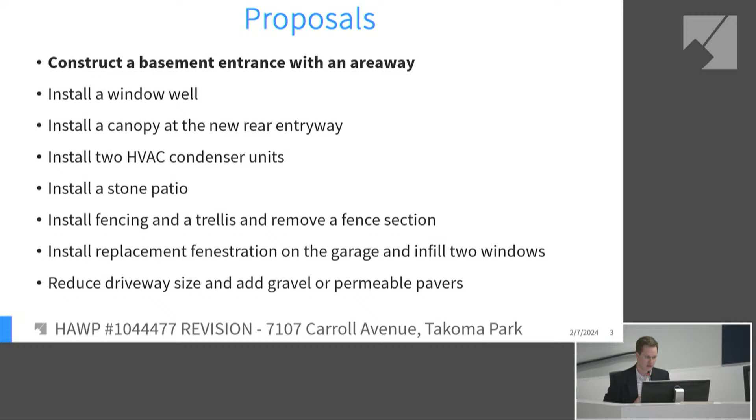These are the applicable regulations: the Takoma Park Historic District Guidelines, Chapter 24A of the County Code, and the Secretary of the Interior Standards for Rehabilitation.

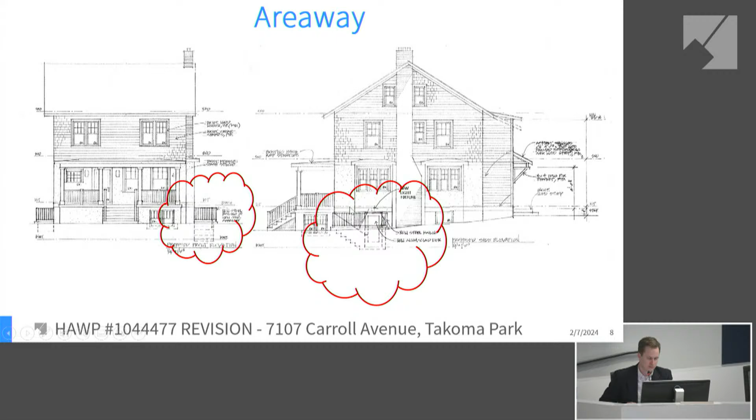So for staff findings and recommendations, staff does not support installation of the areaway in the proposed location. To the first point, the HPC previously approved the 2 shallow window wells under the porch on the right side elevation and a deep well with railing on the left side elevation.

And as I mentioned, they propose a 4th well on the left side elevation as part of this application. The proposal to add an approximately 50 square foot areaway with railing toward the front of the house would be the largest alteration to the foundation at the front of the residence yet.

The feature will be about 50 feet from the right-of-way, so it will be easily visible from Carroll Avenue, and counter to the Takoma Park design guidelines, the major alteration will negatively affect the existing streetscape, open space, and character of the residential property and the wider district.

Further, the areaway also does not meet Chapter 24A of the County Code and Standards Number 2 and 9 of the Secretary of the Interior Rehabilitation Standards, as adding the concrete stairs and walls and metal railing in the location are not compatible with the character of the historic district and will affect the historic integrity of the property and environment.

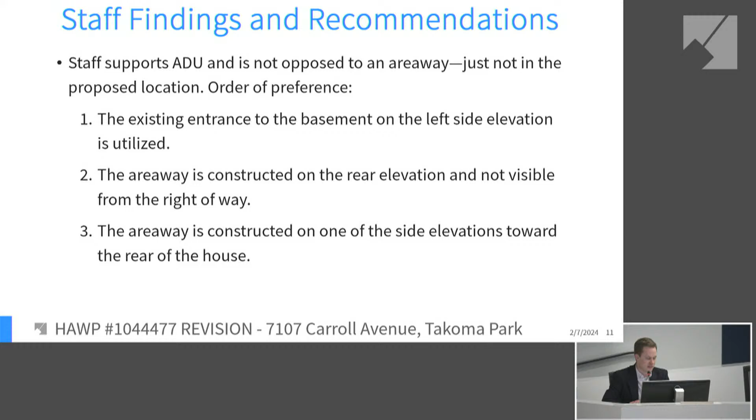The first is that the existing basement entrance is utilized. The second is that the areaway is on the rear elevation. And lastly, that it's on a side elevation farther back.

So there is precedent for recent approval of an areaway in the Takoma Park Historic District. The HPC approved one at 7200 Maple Avenue in 2022 as part of HAWP 982698.

So we'd like to maintain that standard set by the example in this application approved by the HPC. So any questions for staff?

Questions for staff? This is Commissioner Burdett. I did not see on their plans any pathway or paving leading up to the areaway. So the question is, is that supposed to be the main entry or a code required egress areaway?

I'll let the applicant answer that, but my understanding is that it is going to be both the main and egress entrance. Thank you.

Anyone else? Okay, if not, I would invite the owner or owner's rep to come forward.

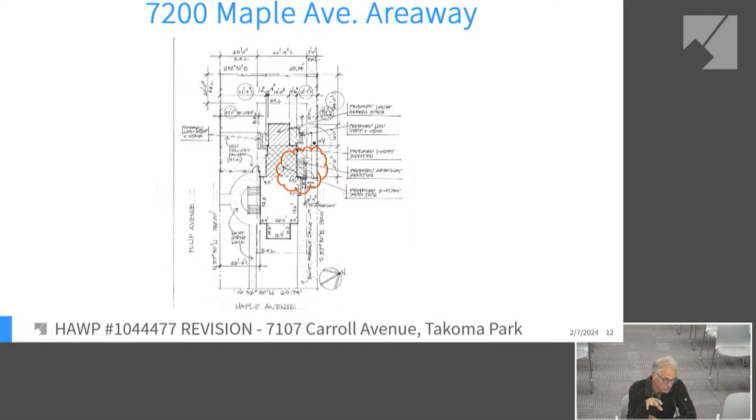Number one, the example of the project at 7200 Maple Avenue, that areaway that's on the corner of Tulip and Maple. That project actually had a second HAWP because the owners said they couldn't afford to do the large addition on the back. So we did a second HAWP for a different design, and that areaway was actually on Tulip Avenue.

So it was visible. It was on the Tulip Avenue side, not on the opposite side. So it was actually an areaway that was very visible from the right-of-way, the side street right-of-way. Okay, so there's a number of things to bring up about the areaway.

Number one, and there was a mention made in the staff report about the number of changes to the basement in this project to create an accessory dwelling unit.

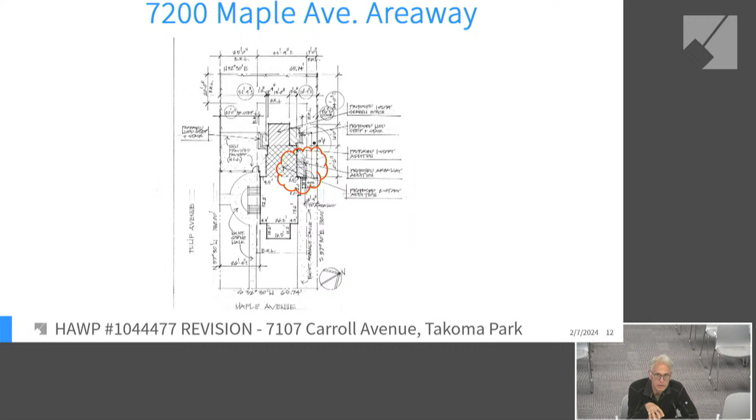There is a change to 1, 2, 3. There's 4 different windows and window wells being installed, and that is to create code-compliant light and ventilation into the living unit. So they weren't just arbitrary, they were to provide code-mandated glazing.

And the side entry off of the driveway that goes to a split stair going half a level down and half a level up, that actually is not a code-compliant egress or entry. So to not have an areaway, we can't really use that side entry as a main entrance. It has a number of problems with it.

I mean, there's a chance we could get a code modification for this type of entry, but that stair has so many problems with it that I would be hesitant to count on that being approved as a code modification. The width of the stairway is insufficient. The headroom is insufficient. The rise run of the stair is insufficient.

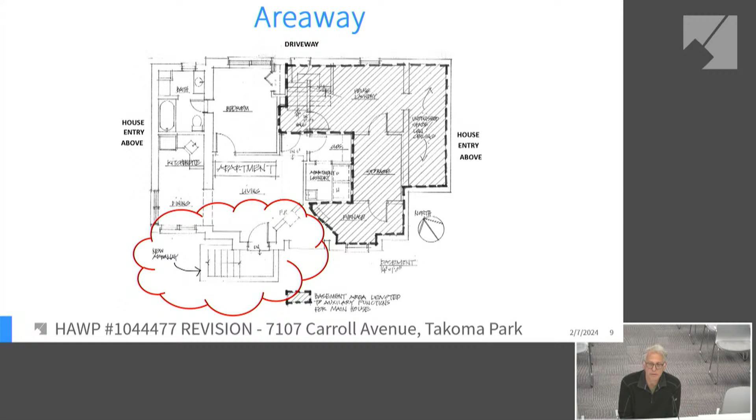The entire back area is fenced in for the use of the owners, so they wouldn't want the tenants to cut through their backyard because it's entirely enclosed with a fence. So they would have to walk around. In my mind, it's really the same thing as if someone parking on the street has to walk to their unit. It's all on private property, so I think it's an okay directive that they do that.

Any other questions? Commissioner Pelletier. Thank you.

I'm just curious why you're not taking the money that you were spending on this areaway and putting it towards making the existing stair more compliant.

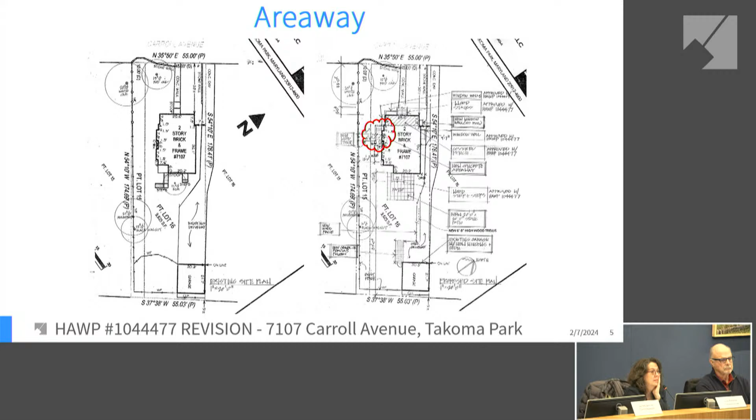It'd be very problematic to make it compliant, but the main reason is that the owners didn't want to share a pathway with the tenant. Is that their way of getting into the house, that side door? That is a way of getting into the house, but it's also the pathway from the first floor down to the basement laundry room. So they would be constantly in a shared space to go from the main house into the laundry room and storage and furnace room. And they didn't feel like that was an acceptable alternative.

Okay, thanks. I mean, if it has to be that way, they would just have to suck it up and do it.

I'm just curious, if they're parking over there, is that door kind of the main door for the owners of the house who live upstairs? Or do they go around to the front, or the back?

We're creating a rear entry, so they would park in the rear. We're also renovating a garage, they may use the garage. They would park in the rear, go through their private fence into the mudroom and kitchen, and that would be, as they put it, 99% of the time for them.

Oh, okay. And people who were visiting would come in, would probably park in the front driveway or park on the street somewhere else and come in the front door. So the front door really wouldn't be the owner's entrance. But it has to be, I mean, they want to create a front porch, so that'll be an entry, but it wouldn't be the main entry for them.

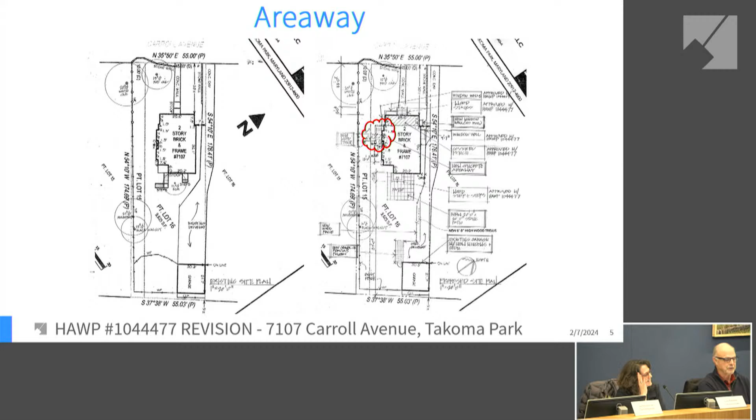I think the main issue really is that the owners did not want to have to create a locking system for that outside door where they would be sharing it with the tenant and then also sharing the stairway with their usage of the laundry room and the storage. It's complicated.

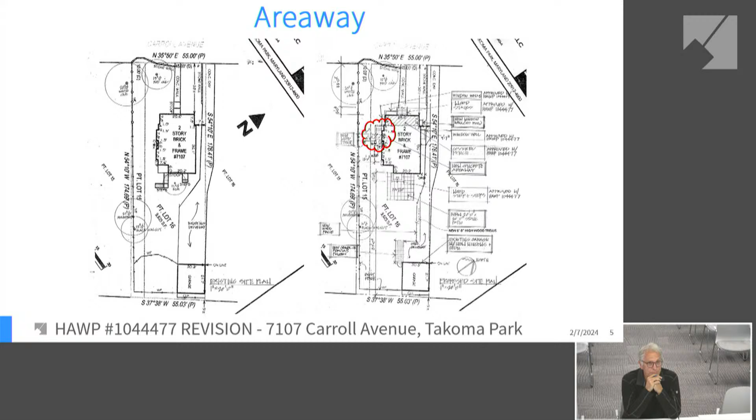Any other questions? Okay. If not, you're welcome to stay there or take your seat. I'll take a seat. And we will start our deliberations. Would anyone like to start the discussion?

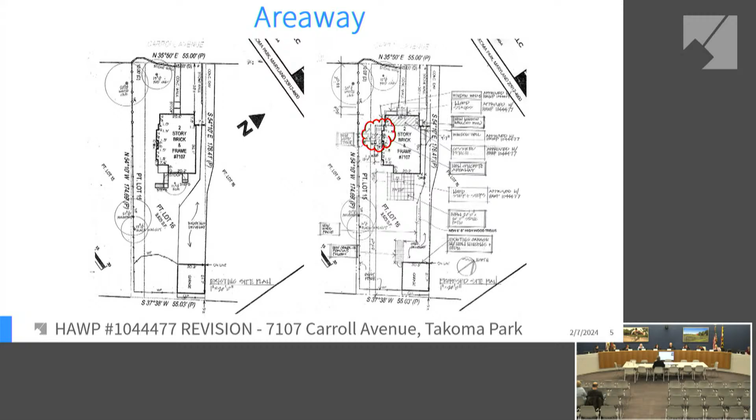Okay, Commissioner Burdett. I must say, while I do understand the owner's preference to not mix with their tenant, you're putting in a window well, a deep window well, and it's an egress window well on that north side of the house, right next to where an areaway would be very advantageous to get into that apartment.

Not knowing what the first floor plan looks like, obviously I'm just looking at the basement floor plan. It just, to me, I'm not sure I understand why more effort isn't being made to get the entrance area well on the north side of the house instead of the other way around, instead of where it is on the south side.

And then also, simply because it's so inconvenient for the tenant, I'm just thinking about snowy days, rainy days, all those days when it's just not pleasant to walk across a muddy yard. And I'm not seeing paving or anything like that that we will have to approve, paving around on the front of the house, going down to the sidewalk or in front of the porch.

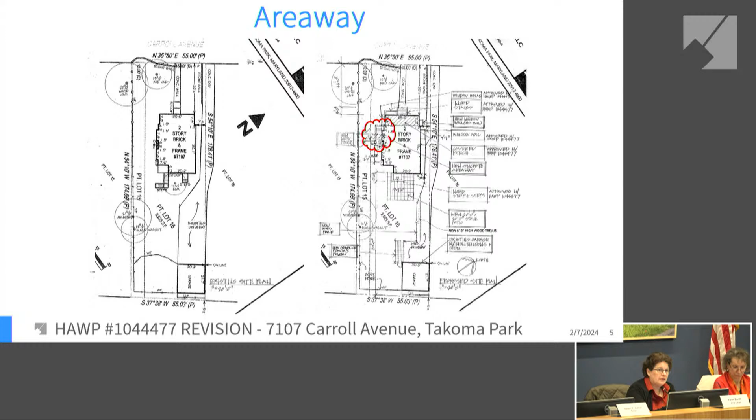And I guess also, the plan is a pretty basic plan, as if it's almost as if, could you have flipped it? The plan just 180 degrees so that the dining room is again on the north side. So that is just, was that explored? It should have been explored with the restrictions on this property.

With all that said, I think flipping the areaway you have shown should at least be shown flipped so that the first step down is to the east by the fireplace, by the chimney, facing backwards. And that is going to be wildly inconvenient for the tenant again, but it does pull that areaway a little bit further back.

But we are only talking about a rail at this point, correct? That is going to be visible from the street. So it's only the handrail around the areaway, which actually might be better if you're just seeing the one rail as opposed to the brake and the rail pulling around it. So those are my comments.

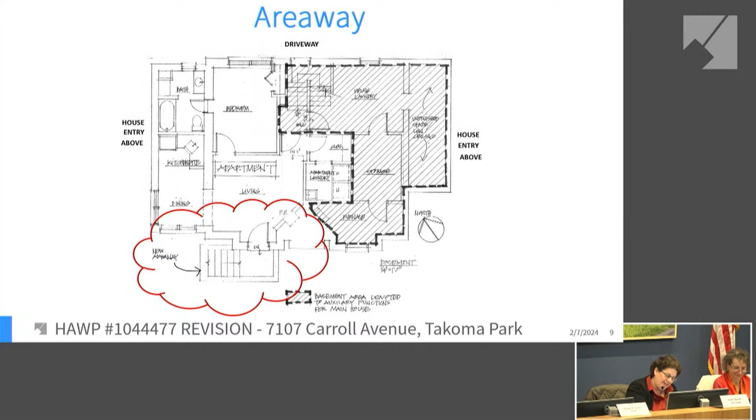Okay, all right. They're kind of rambling. Someone please take this further. Here, oh, sorry, go ahead. Commissioner Doman, this is Commissioner Doman.

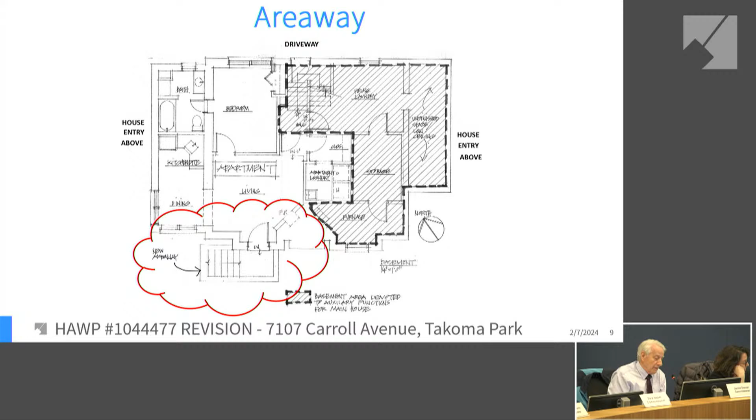I actually don't have any problem with this. I think the only thing is the visibility of the handrail, if I understand this correctly. I did not drive by the property. I did not see the property, and I don't know how visible this would be. Seems to me it's far enough back off the road, and we're not talking about a highly visible modification to this historic district. I just think that this is pretty unintrusive and pretty minimal, so I would support it as presented. Thanks.

Commissioner Pelletier.

Commissioner Burdett's idea of flipping the plan and using that areaway you already have, the egress areaway, kind of making it bigger. I keep wondering why you couldn't put two doors in there. If you got rid of that bottom stair that went down to the basement and made the areaway on the north side bigger, you could get in there. Maybe you have the windows, I don't know, I'm designing this in my head, but that one's already approved. So if you could make it a little bigger and a little longer and get rid of the one on the other side, I think it could work. Obviously you'd have to figure that out.

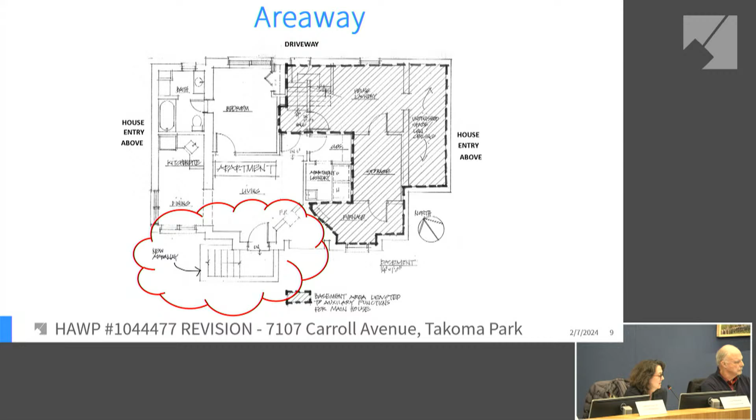I think there's just getting to be so many little things coming off of this house, like all the window wells, and I know they're low and won't have railings, but it's getting to be kind of a lot of alterations on the facade. So I would encourage you to maybe explore that other option for entry from the north side.

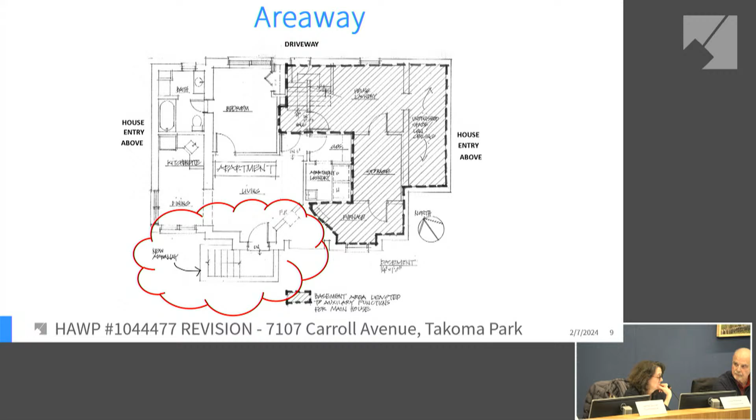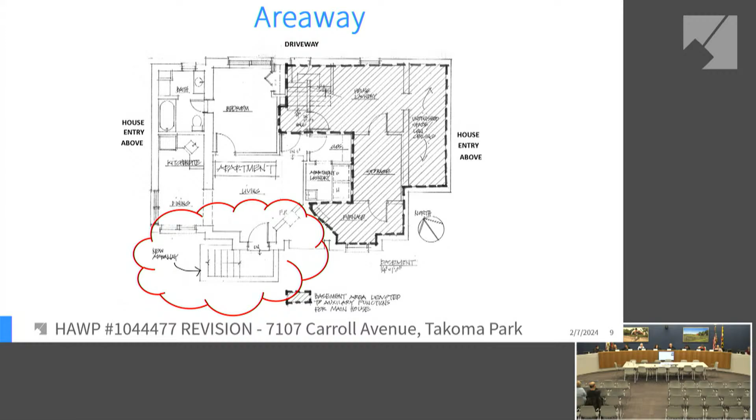That's all I have to say. Anyone else? I would like to have the picture of the house brought up again, if you could. Gosh.

I think personally, I sort of sympathize with the owner for what they want to do. Would I like to see it different? Yes, but I think the reasoning and the actual impact, I don't think the impact is substantial. I think the reasoning is reasonable. So I think I could support the project as presented.

Anyone else? Don't all speak at once, please. Do we vote? I'll speak. Commissioner Radu.

Looking at this photograph, if the railing — I'm looking at the main rail into the main stair, and it's not super visible. So if the rail at the new areaway would be minimal, the simplest rail possible, I think I can support this too.

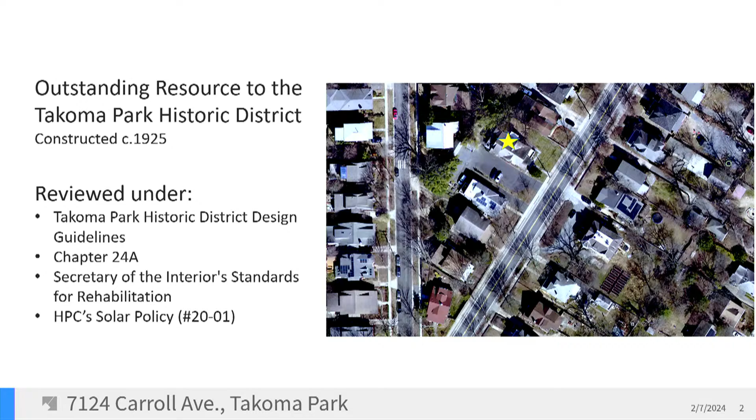Next. So the proposal is to remove the existing 3-tab asphalt shingle roof and install Timberline architectural shingles, including 3 sections of 48 Timberline solar shingles shown in the 3 locations here. Next slide.

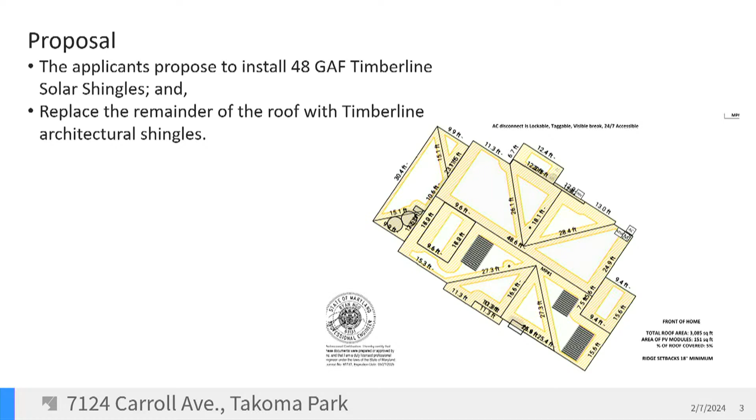As you can see, there are actually several outstanding resources surrounding this: one immediately to the north, one to the southeast, one immediately behind, and another one two doors down to the south. You'll see that both 7120 and 7118, the properties just below the subject property, both have solar panels on the roof.

In both cases, the HPC found that the solar panels would not significantly detract from the historic character of the houses or the surrounding district. For 7120, the HPC found that the narrow setback and 2-story height mitigated the visual impact of the panels. This was approved in 2014, long before the solar panel policy was adopted. The HPC also identified the rectilinear configuration of the panels at 7118 as a preferred arrangement, which created a more uniform appearance, and that HAWP was approved in 2021.

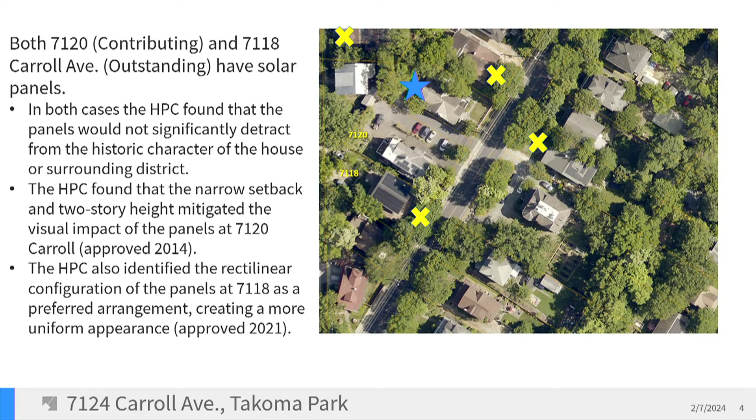We can move on to the next slide.

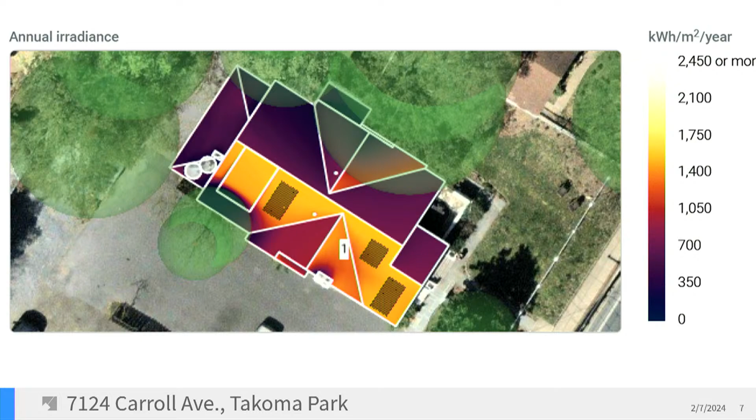Since the time of the staff report's posting, the applicant provided this roof heat map showing that the proposed locations are those with the highest solar collection. I believe, and the applicant has not cleared this up yet, that the dormer further to the rear of the house has a slope too narrow to accommodate the solar shingles, which is why they're not proposed for there as well, where they would be, for all intents and purposes, invisible from the right of way. We can move to the next slide.

I understand that a sample shingle was passed around during the work session, but unlike most other solar applications, the solar shingles are actually nailed to the roof sheathing just like any other shingle would be. Then they're wired to one another above the roof surface, allowing you to make as large or small of an array as possible.

And then they're covered with a wire cover piece, which you see in the lower right, meaning that the only penetration into the roof is at the highest point of the solar array.

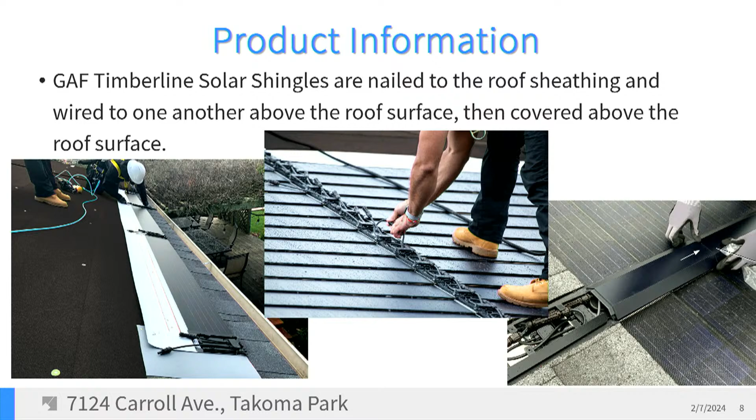Multiple sections can be tied to one another through there. It makes for a relatively quick installation compared to either traditional solar panels or something like the Tesla panels we've seen, which require almost a whole week for a roof because those are all wired underneath the roof sheathing. We can move to the next slide.

Staff finds that removing the existing 3-tab shingle and replacing it with an architectural shingle roof is a compatible change that could be approved at the staff level. Staff finds that the preferred locations are not appropriate for solar installation: the lot is too small for a freestanding array, the accessory structure is too small and not engineered to accommodate the added weight of any solar, and the rear addition is too small to accommodate the shingles and faces north, while the house orientation requires the panels on the left side to effectively collect sunlight.

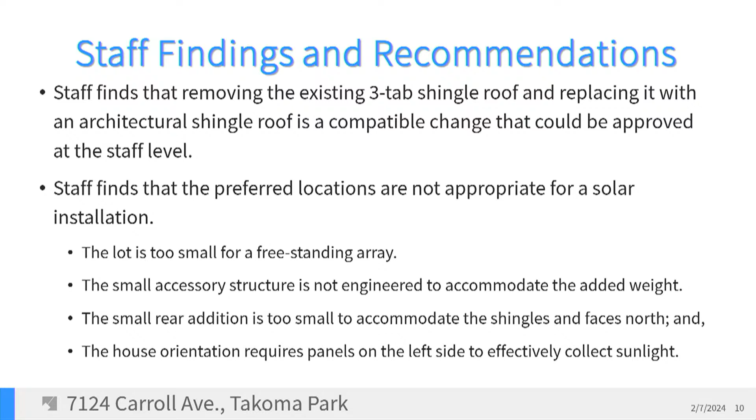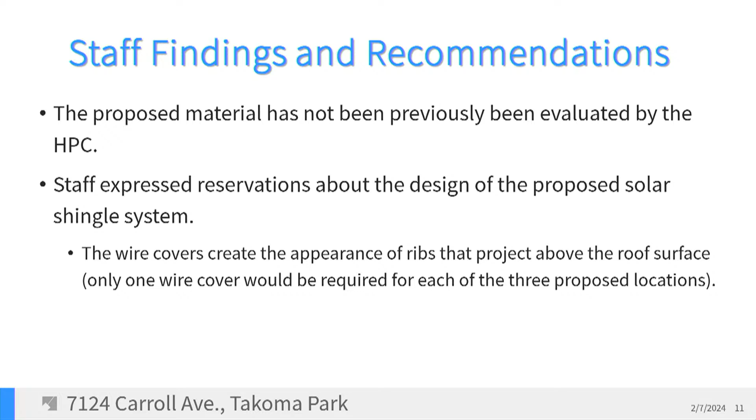The reason we're having this as a preliminary consultation is the proposed material has not been previously evaluated by the HPC, and staff has expressed some reservations about the design of the proposed solar shingle system. The wire cover creates the appearance of ribs that project above the roof surface. In this instance, only one wire cover would be required for each of the 3 proposed locations.

So again, this is just to reiterate from the staff report. The first question tonight is, does the HPC concur with staff's finding that the proposed locations are appropriate under the solar policy, or should some other consideration factor into the analysis for a HAWP? And does the HPC concur with staff's finding that the material is potentially inappropriate under the solar policy, under the standards, and under Chapter 24A?

And with that, I will answer any questions that you have for me at this time. Any questions?

Commissioner Doman, did the applicant provide information as to what percent of the building load would be provided by the solar? This may be something you don't know, but I was wondering if that information is available—I didn't see it in the report.

It's below 100% for this property. One of the interesting things about solar shingles is they aren't as efficient as a traditional solar panel, in part because they're nailed to the roof sheathing. Air isn't able to circulate underneath them and cool them, and solar panels are less efficient at higher temperatures. So this system benefits from ease of installation but is slightly less efficient than a traditional solar panel roof. This also offers flexibility to make the system larger or smaller based on the size of the roof and the needs of the consumer.

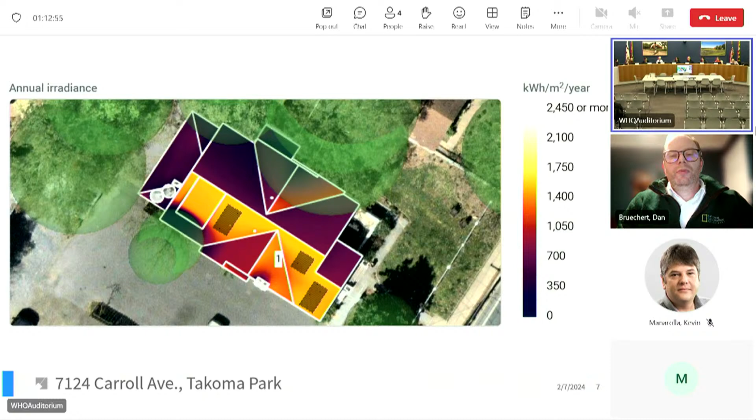Okay, if not, now I'm a little confused about who will be speaking. Will anyone be speaking on this? No, Chair Sutton, there is nobody to speak for the applicant tonight. Okay, is that correct? No one's here? Or there's no representative from the company either, correct? That is correct.

Okay, now we decided in the preliminary to go ahead with this, understanding that there would not be a property owner or a representative here, but we felt it was important to give our assessment of what we thought about this particular way of dealing with solar panels. We know that probably as things move along we're going to have different types of solar panels. This is one that we have not, to my knowledge, dealt with before. And so I think it would be to our advantage to give our opinions of what we think about this particular way of dealing with solar panels.

So would anyone like to kick off the discussion as to what your opinion is with this particular panel? We, of course, will give our opinion to the owner, and they will do whatever they want from that. So anyone like to kick that off? Commissioner Doman. Sorry, no, go ahead.

As you mentioned, we will always be looking at new products that come up, and each one will have to be evaluated on their merits. I think the roof application is mandatory in this case, it looks like all the heat loading and the solar heat gain is on the particular side where the panels are located. I guess what I would be a little bit concerned about is the optics of it. I mean, these things are sort of a dark gray or black, and in my opinion, if you had a roof that was a really different color, I think it would be quite obtrusive. I wouldn't like it, but if you can blend the roof in to be the same color as the collectors, I think that would be an approach. So that's only a comment. We're just looking for comments on how we could approach this new collector.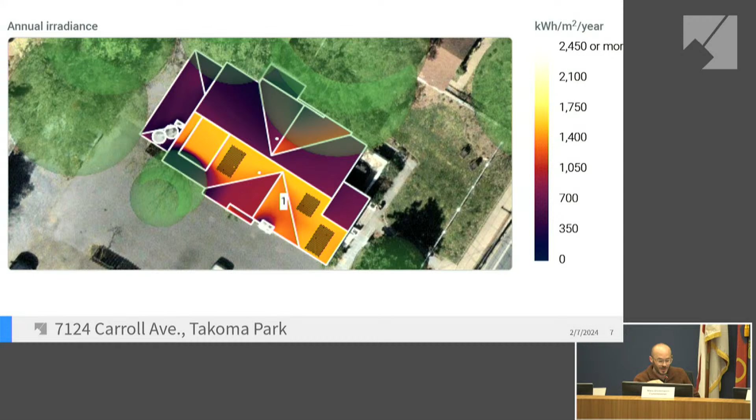Thank you, anyone else? Oh, Commissioner Dominiani. Hi, this is Commissioner Dominiani. To pile on as well, I think the rib that carries the wires, adding the long batten piece, piling onto what Commissioner Pelletier says, unfortunately I don't find to be compatible, and I think it would draw a lot of attention to that color difference where the solar panels are going to be located. I think it might not be appropriate. I understand it's a powerful tool for generating electricity, et cetera, but it might not be an appropriate application where it'll be visible from the street, because that rib does draw even more attention, being perpendicular. A few of the photos shown in the presentation show the rib reflecting light separately from a different angle compared to the panels, making it very visible to people walking by or from rights of way. So in my opinion, this is an interesting product, perhaps not best applied right here.

Anyone else? Commissioner Burdett.

The HPC sometime last year or the year before went around Takoma Park looking at existing solar installations, to get a feel for how they worked, so we would have a better understanding of the technologies and how they end up looking on houses in Takoma Park, which have a lot of dormers, gables, and interesting roof forms. It was a very informative exercise on our part.

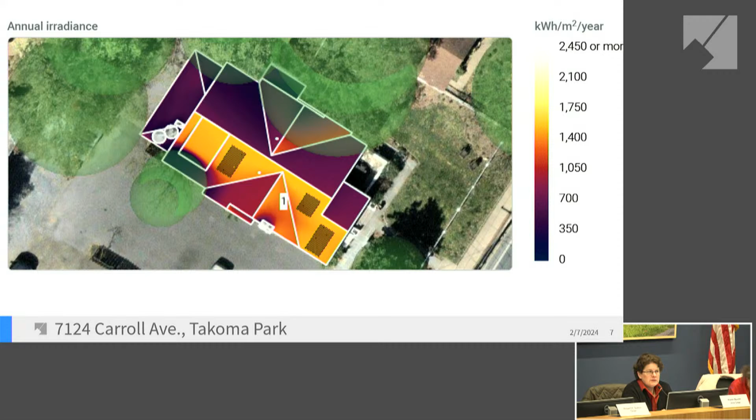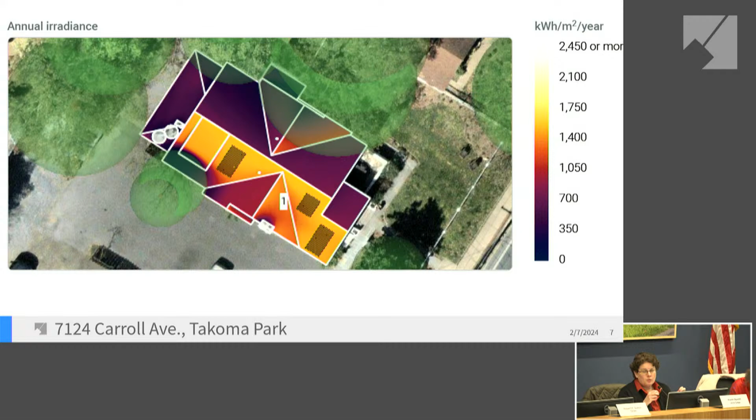One of the guidances we had after that was that it's always better for these installations to be coherent on the roof. They make sense, rather than a patchwork of panels here and there just trying to get the best power, because solar companies are technical, they're all about getting the most energy produced, whereas the rest of us are visual. If it looks like clutter on the roof, it's clutter, no matter how much good it's doing.

That's how we encourage more traditional installations, to try to get these things to look coherent. Even though this is a low profile product with merit, my initial take looking at the photographs is a big gray tarp with 2x6s nailing it into place. That's a crude way to put it, and I'm sure it doesn't look like that in real life—it looks better—but it lacks visual coherence.

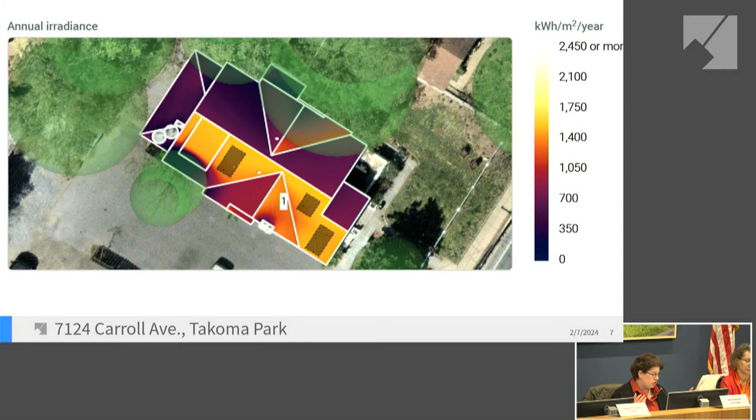Even the one photograph of the larger house—obviously nothing in one of our districts—where it's six in a row, even if they put a false batten at the end and along the tops, it would make more visual sense. So it concerns me that this little house just looks like tarps put down on a failing, leaking roof. That would be my concern.

So I would like to see from the applicant some more photographs of comparable installations, and more information about whether this is really it, or if they have some options that make it look a little better. Because I think the technology, if it's really just these 65-inch by 7-inch shingles that stack, it's going to be great on modern contemporary subdivisions, but maybe not going to work as well on Takoma Park roofs. So that's my take.

Question. Okay, go ahead, yeah that's fine. I think we're sort of trying to—yeah, that's absolutely fine, ask a question if you like. Okay, I'm sorry, that's my last question. There's... famous last words.

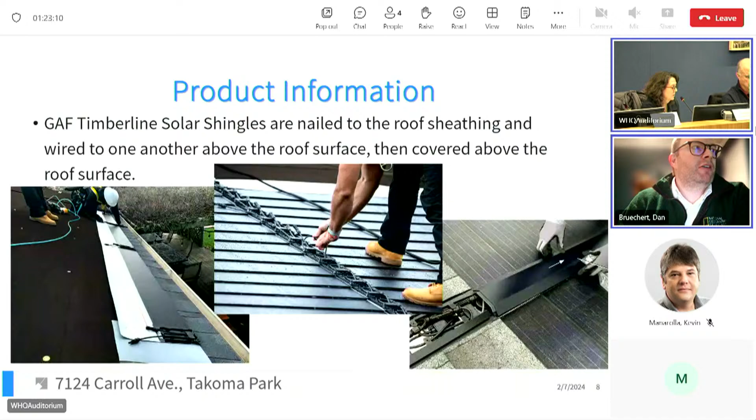I was just curious if this brochure is what they're doing—are they re-roofing, or are they just... Yeah, so they are removing the entire 3-tab shingle roof, and the solar shingles are installed during that roof replacement.

Real quickly, if I could share my screen—the applicant did provide, after the staff report went out, a rendering. I don't know if you're seeing it, yeah you're seeing that. So this is the location and size. It's not from grade, obviously, but it does provide some perspective about where the solar shingles are proposed and how large they're going to be.

The one in the rear is totally obscured by that side dormer or side gable roof, so it won't be visible at all from the right of way. It really is these two in the front that are going to be much more visible.

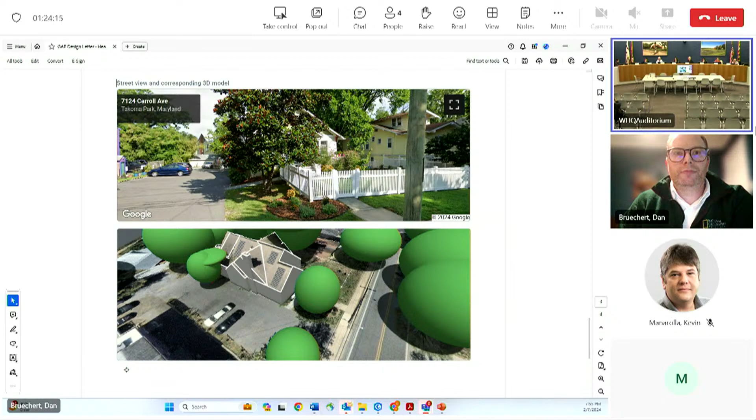Okay, thanks. Anyone else? Commissioner Galway.

Commissioner Galway: I'm not going to repeat everybody else's comments, but I heard things like it's not compatible, the optics are a little off, there's a patchwork of panels, and I tend to agree with all of that. I do compliment the owner for trying to save energy and use renewables. I think that's a very positive thing.

But when I look at the math provided here, the area of the PV modules is 151 square feet, and based on what the manufacturer says they can get out of the panel, it ends up being 2,150 watts, or approximately 1.35 hair dryers. So I question whether this patchwork of, in my opinion, unattractive panels is worth all the trouble. I applaud it, but if it were in a location where we really wouldn't be able to see the panels, that's one thing. To see this on the front of the house for the very small value it brings, I'm just not on board. Thank you.

Okay, if no one else has comments, I have a couple. First, there are companies, which I won't mention, that provide shingle-type covering that covers the entire roof, and I think that's very desirable. The other ones we've looked at and approved are panels that are attached to the roof. My main concern about this is that it becomes a permanent part of the roof, and I think it's not attractive. I think one reason we've been approving solar panels in the past is we look at them as sort of temporary.

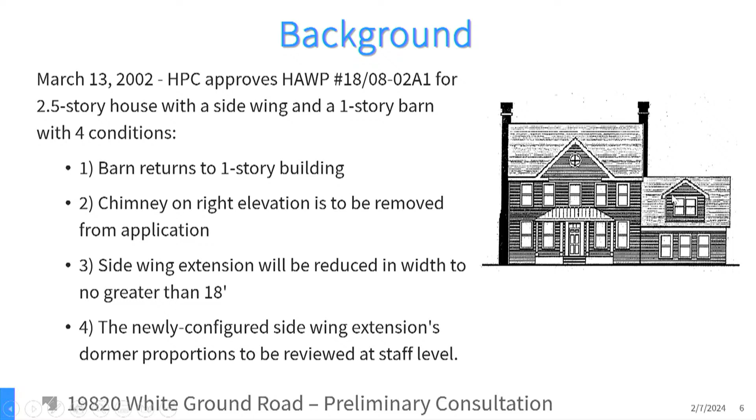The applicant appealed the HPC's decision. The Board of Appeals allowed the 2nd story on the barn, but affirmed the HPC's decision to deny the 2nd chimney and limit the side wing to 18 feet and require staff to review the dormer on the wing.

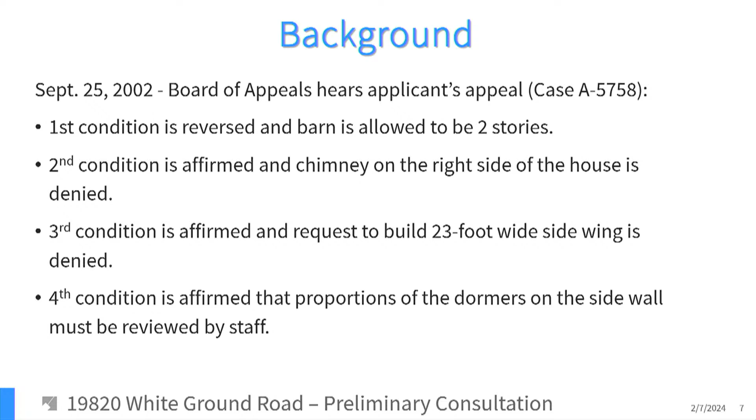Later in 2002, the applicant came back to the HPC with the redesigned side wing. The HPC approved the plans with those 2 conditions listed there, again requiring that the 2nd chimney not be built on the right elevation, and of course this house was never built.

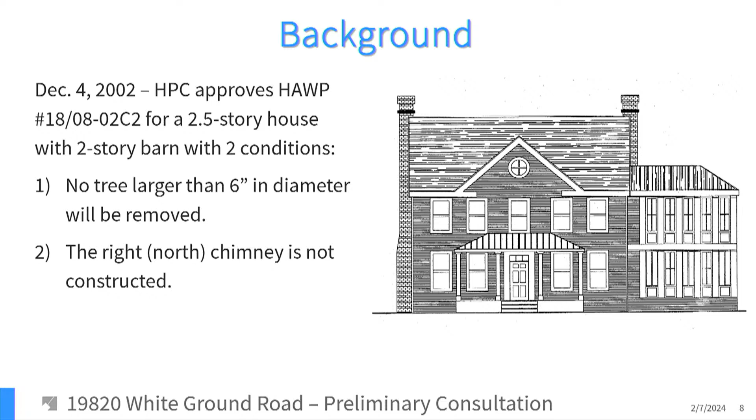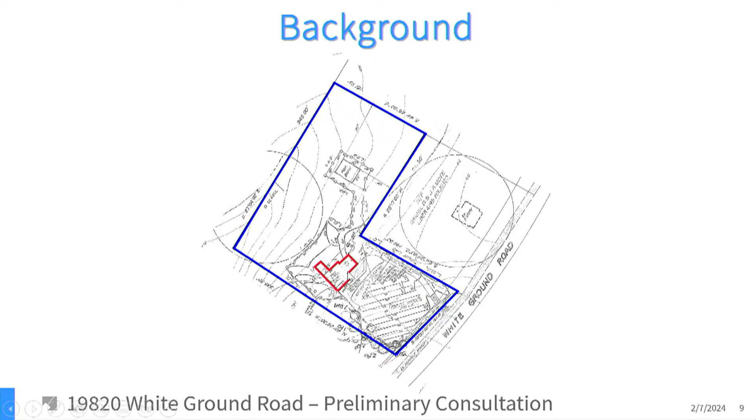Here's the site plan for that 2002 approved house with the property lines in blue and the proposed house footprint in red. It was set back, or proposed to be set back, about 150 feet from White Ground Road.

Comparing it to the current proposal, the applicant proposes to set back the house about 100 feet from the road, and it would be located—these topographic lines show that it'll be on the highest point of the property. The subject property is adjacent to 2 residences listed as primary resources within the Boyds Historic District.

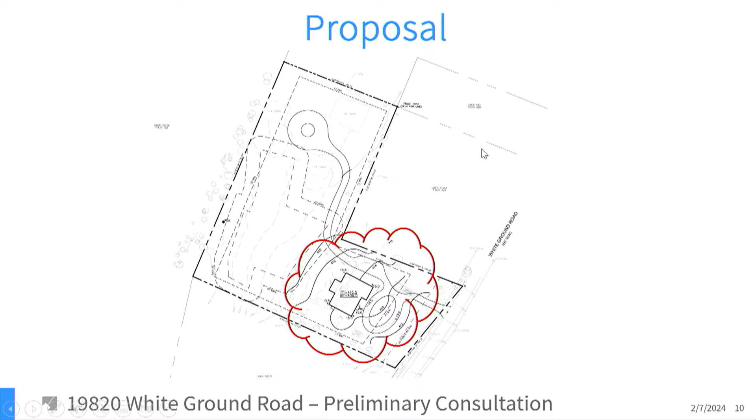The residence at 19810 White Ground Road is set back 90 feet from the road, and that's over here. And 19900 White Ground Road is set back about 35 feet from the road.

It will measure 34 feet 9 inches tall from the ground to the roof peak at its highest point. A 2-bay wing will be located on the right side. The 22-foot wide wing will also be 2.5 stories tall, slightly set back.

Here are the floor plans. As you can see, the ground floor, which is over here, will have an in-law suite, and the top floor will have 4 bedrooms.

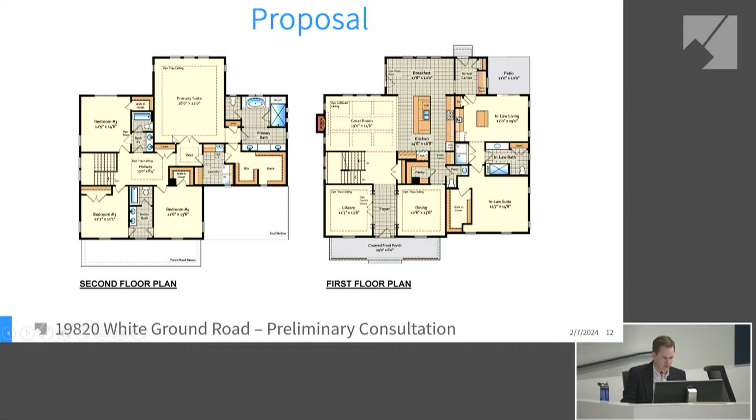It's set back about 430 feet from White Ground Road and behind two other residences, so it's minimally visible. And staff does not believe the massing on the wing should be used as a model for what's proposed on the subject property at 19820 White Ground.

So to summarize staff's opinion: the proposed building size, scale, and massing are too large compared to the other homes in the district. The proposed wing is too wide than what was initially approved back in 2002 and affirmed by the Board of Appeals—the 18-foot width limit for the wing.

I guess one of the questions alluded to earlier is why the house is located where it is. In the previous application, the house was set 150 feet back, and now it's a lot closer to the road. It's also on a prominent high spot on the lot, if I interpret this correctly. Is there any reason this could not be moved further back? And my other question would be, what is the elevation from grade level to the peak of your ridge roof on the house?

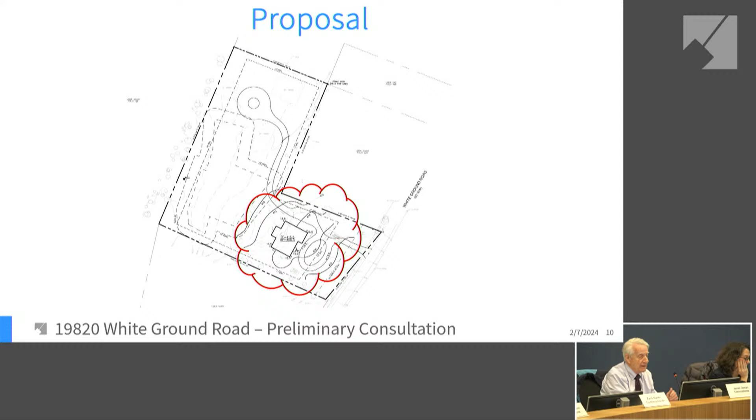So on your first question about the location of the house, I believe the house could and would be set further back, and I believe that would work. We addressed that in our application, 150 to 200 feet from the street. Regarding your second question, as to the height of the structure, we're using a number closer to 34 feet in height, but it would be under 35. At this point, we're early on in our preliminaries, but it would be approximately 34, under 35 feet in height.

Any other questions? Commissioner Burdett. Looking at a septic field layout from 1982, is the intention to lay the septic field out towards the front, from the front of the house to the road? Is that still your intent?

The septic system had already been determined, I believe, before we were brought on. It had been perked, and that's where it had been located when you all purchased it. It's going to be in front of the house, between the house and the road, correct? Right, that's where it's shown now.

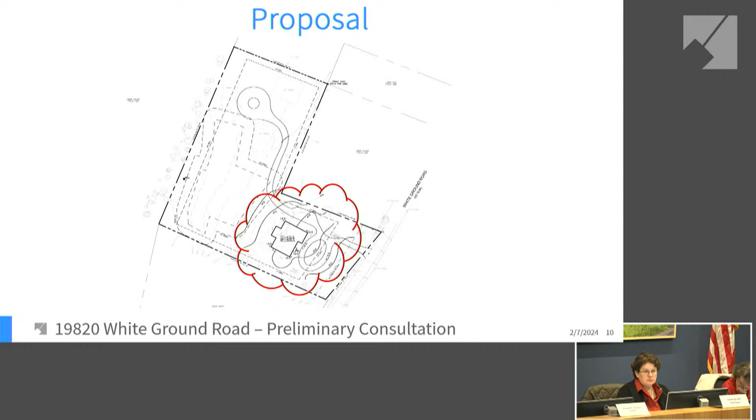In '82, when this was done, I'm assuming the current house is much larger than what was done, so has that also been checked? The original footprint approved by the commission was approximately the same size. I believe the box of the house was around 32 feet, and the piece to the right of the house was approximately 18. Ours is 32'3", and it's 21'8". We could modify our existing structure to follow very close to that footprint as far as the frontage goes, if that would help.

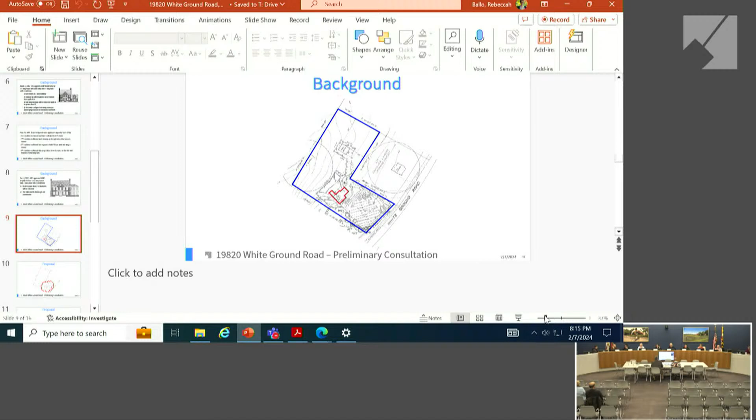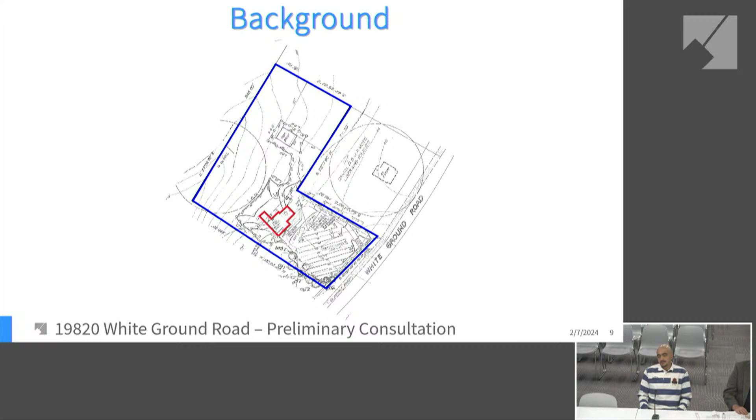Next question, the existing barn structure or farm buildings, are they going to be maintained on the property, or will they be removed? Is this going to be just a residential lot without any other use to it? Our intent is to use that as a detached garage, and yes, we're going to maintain it and use it for storage.

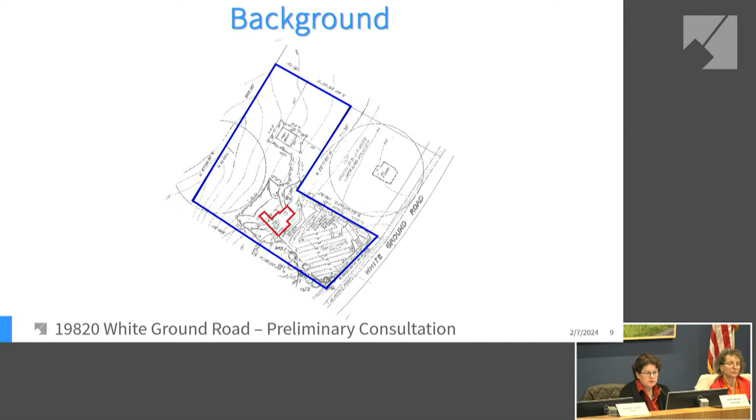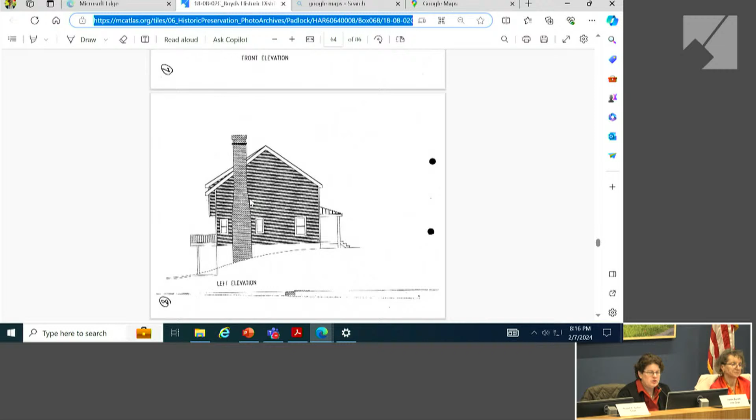But you're not going to be planting any small lots or a large garden area, or put up a horse ring or anything like that on the back of the property? Did you look at putting the house behind the other houses, your adjacent properties, back where those barns are? Because it would make a difference if the house was positioned further tucked away, put it that way. Just asking.

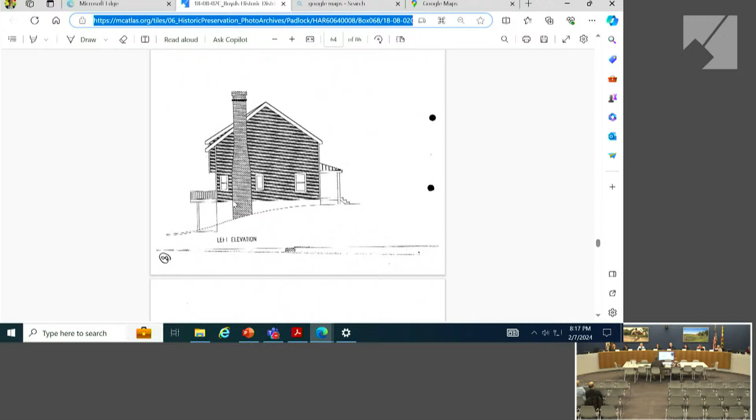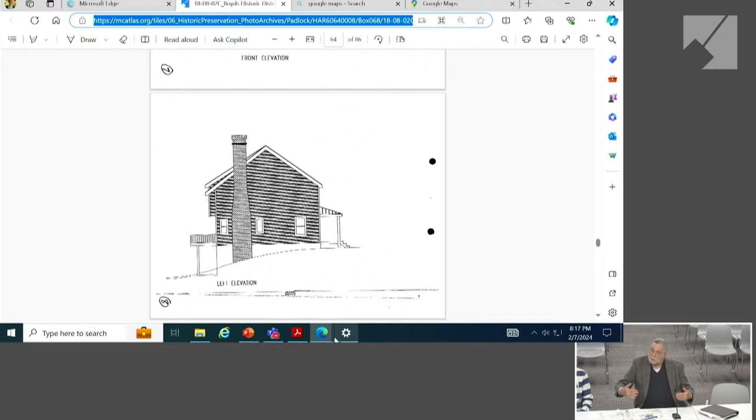I would be happy to look at pushing the house further back. Sometimes in working with other historic groups, in many cases they want us to respect the BRL and pull the structures more up toward the street to maintain that look. In this case, if you feel it would help the feel of the rest of the neighboring houses, we'd be happy to look at pushing the house further back on the lot.

One other question I have, the roof structure for the house, is that just trusses, or is there living space up in the attic area? On the main body of the house, we were proposing an attic built into the trusses, an attic loft space. It's approximately less than 1/3 of the floor area, and it would be like a granny room. The only way you would know it was there is on the gable side, there would be a window up above the stair.

Okay, thank you. Any other questions?

Okay, thank you so much. Now what we will do is we will deliberate here. We'll give you what we think about the project. I am very proud of the service we provide, because we want to make sure that when it comes before us for a historic area work permit, that we're able to approve it. So we will give you what we think. That said, you're not required to do what we tell you to do, but it's often a good idea to pay attention because it will come before us at some point for a historic area work permit.

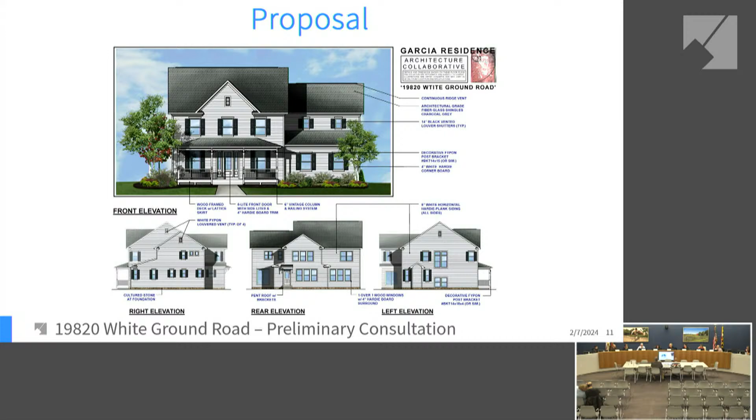Okay, I think, unless I've missed something, there's several things here that I think are relatively consistent across the board. I think everybody feels that if you can move the house back further on the lot, that would be a big advantage. If you could reduce the height of the house, that would be helpful. And any way to reduce the massing of the house, I think, would be helpful as well.

Personally, I understand what the issues are. I think it's very commendable that you're looking to have multiple generations in the house, and I think obviously you need to have space for that. So I get it. But if it any way could be reduced, I think everybody would be happy with that. I think you're on the right track.

Personally, I think the basic design looks very much similar to other infill houses. I think that's commendable. I think you're on the right track, and I look forward to seeing this house in the future. So thank you so much for coming before us.